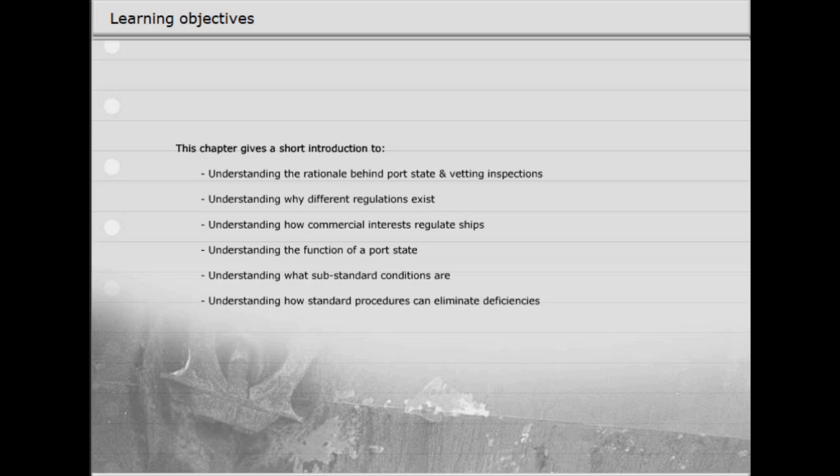The US Coast Guard exercises port state control in US waters. It ensures compliance with the pollution prevention and safety regulations.

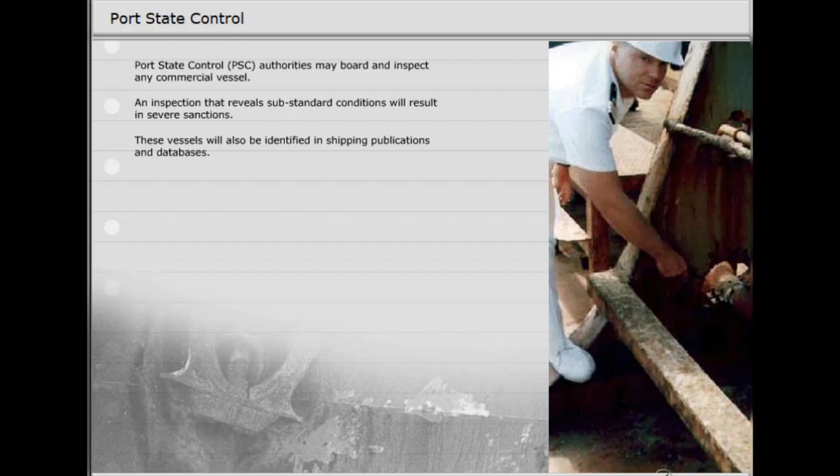The Oil Companies International Marine Forum is a voluntary association of oil companies. It maintains the Ship Inspection Report Programme. This is a large database of up-to-date inspection results about tankers.

The Chemical Distribution Institute provides a control scheme for chemical carriers and terminals. It also trains inspectors from senior chemical carrier officers. The database is available to all participating companies, ship owners and terminal operators.

The adoption of standard procedures is mandated under the International Maritime Organization's International Safety Management Code. It requires most ship operators to have a certified safety management system in place. Click on the illustrations to read about them.

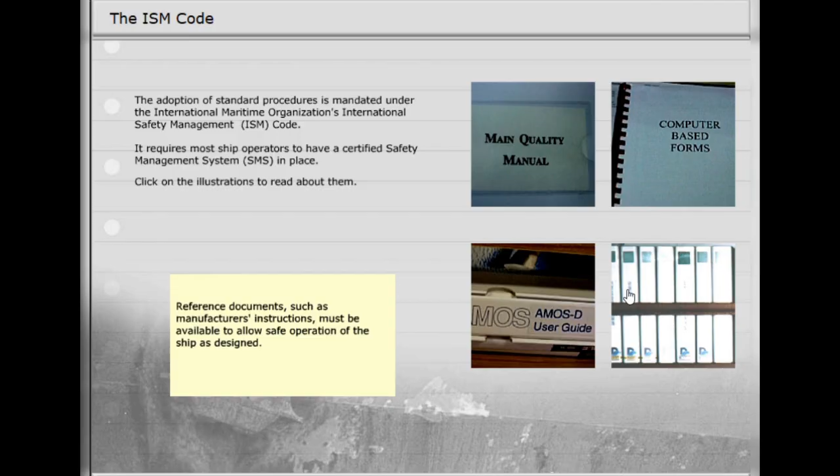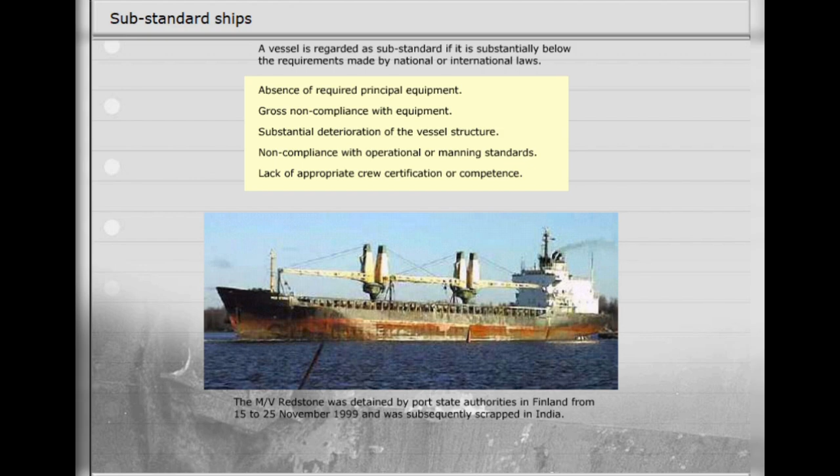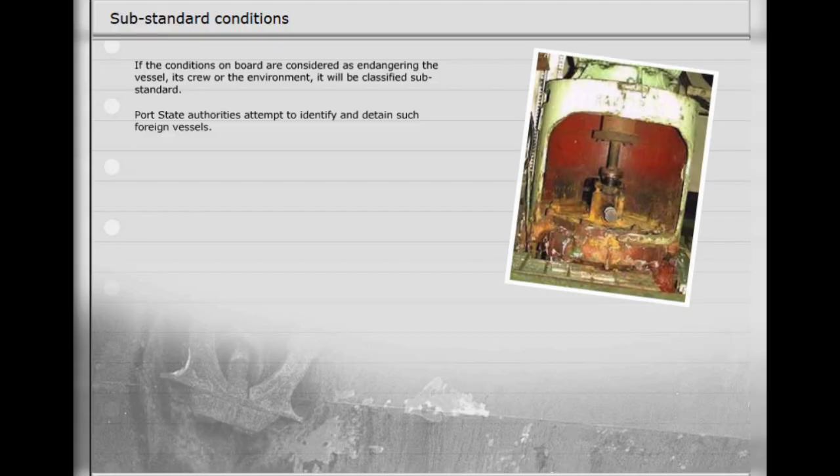A vessel is regarded as substandard if it is substantially below the requirements made by national or international laws. If the conditions on board are considered as endangering the vessel, its crew or the environment, it will be classified substandard. Port state authorities attempt to identify and detain such foreign vessels.

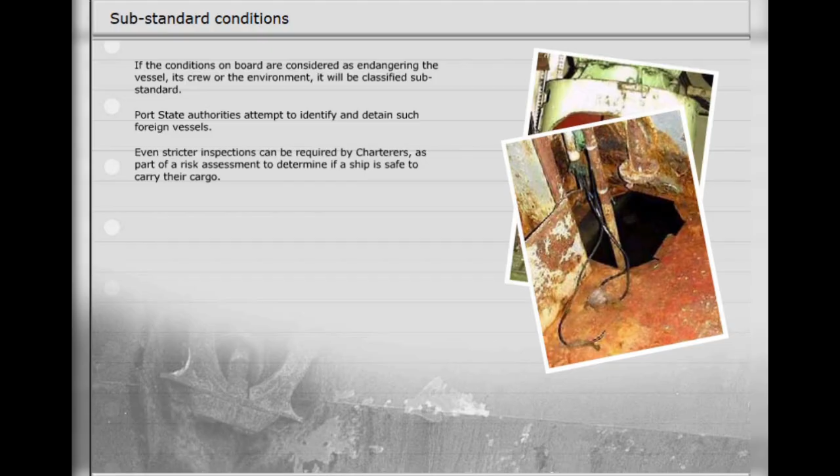Even stricter inspections can be required by charterers as part of a risk assessment to determine if a ship is safe to carry their cargo. Tankers are faced with the most stringent requirements from the oil and chemical companies which use them.

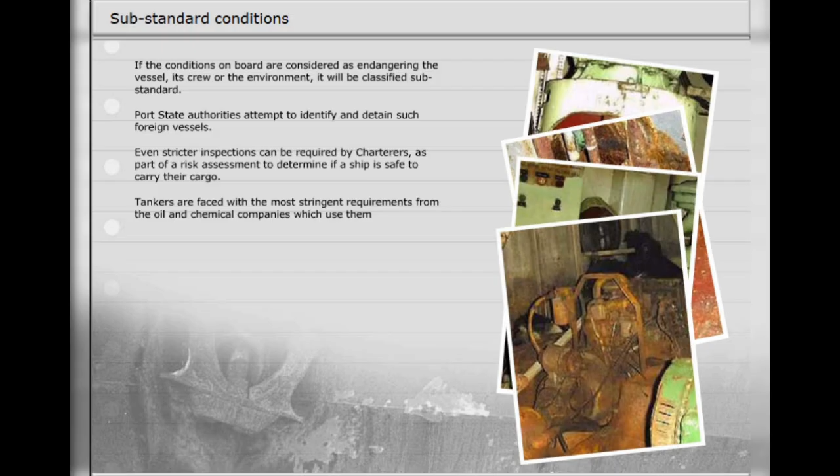Several publications serve as references and guidelines that can prevent port state sanctions. Click on the icons to read a list of some of them.

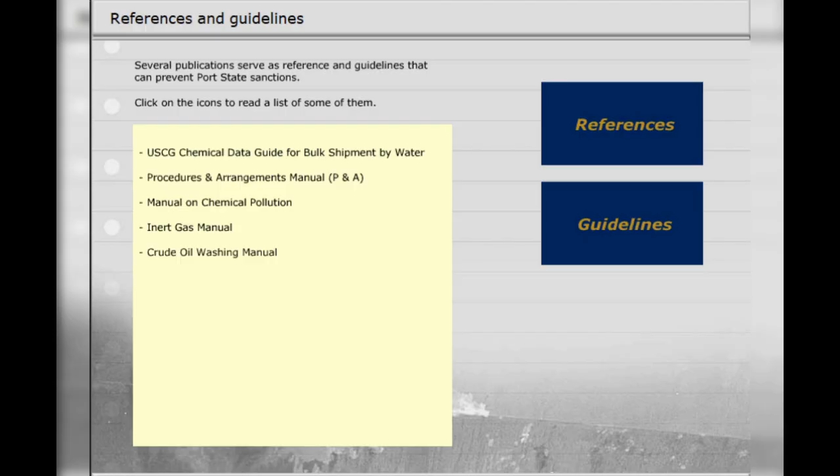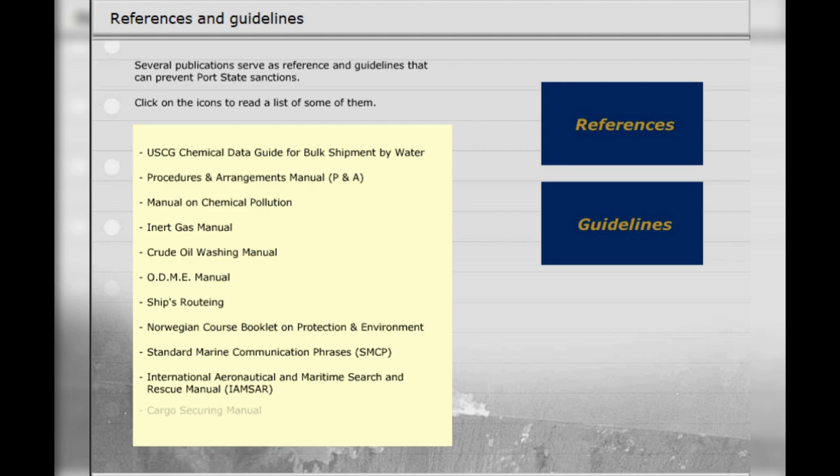If the officers and crew comply with the company's standard operating procedures, deficiencies will, for the most part, be eliminated. Creating and working within a properly developed safety management system should be the primary focus of the operator and the man on board.

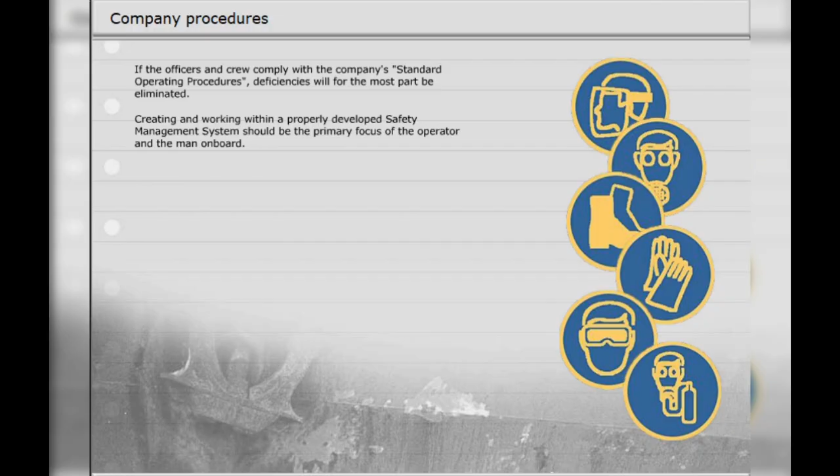An inspection cross-reference is very helpful to the men on board during an inspection. It allows reference to company procedures in the SMS manuals, where vetting or port state requirements are met. It should be used during the inspection and at the closing meeting with the inspector. Inspection findings and ship's comments should be reported to management at the earliest opportunity.

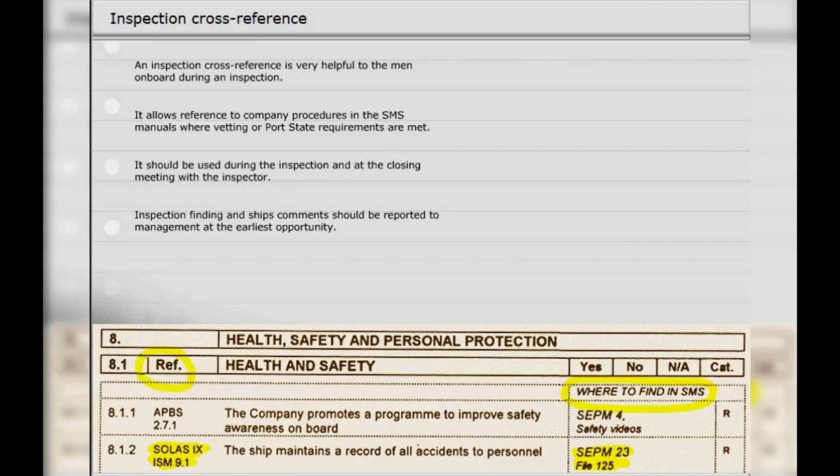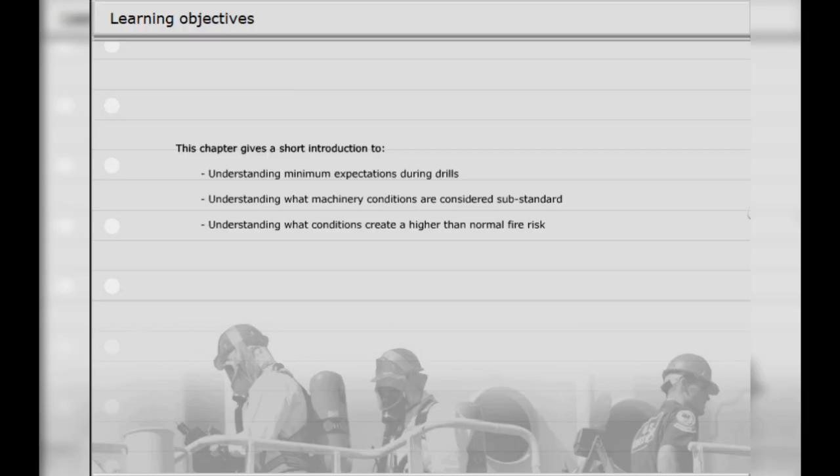To, understanding minimum expectations during drills. Understanding what machinery conditions are considered substandard. Understanding what conditions create a higher than normal fire risk. Understanding how inspectors determine crew awareness of instructions and procedures.

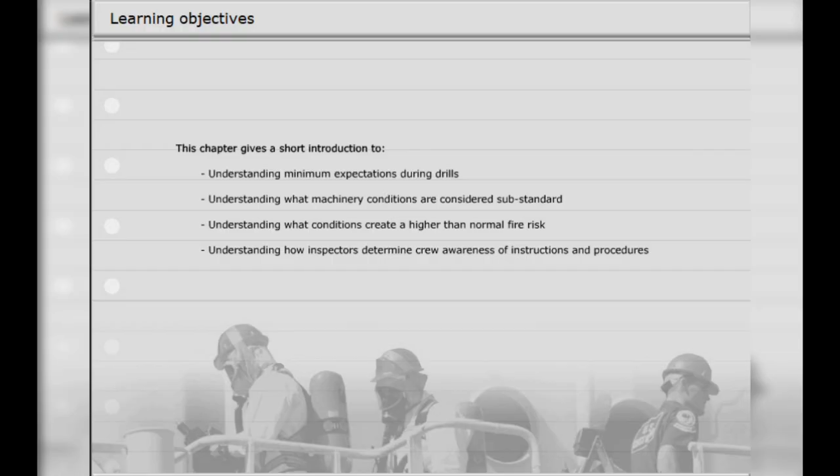During inspection, both equipment and crew competence are tested. Inspectors will focus on emergency drills. Failure to perform basic fire and lifeboat drills will certainly result in detention. Since the master is normally on the bridge, the chief officer must demonstrate that he has command and control of the emergency team.

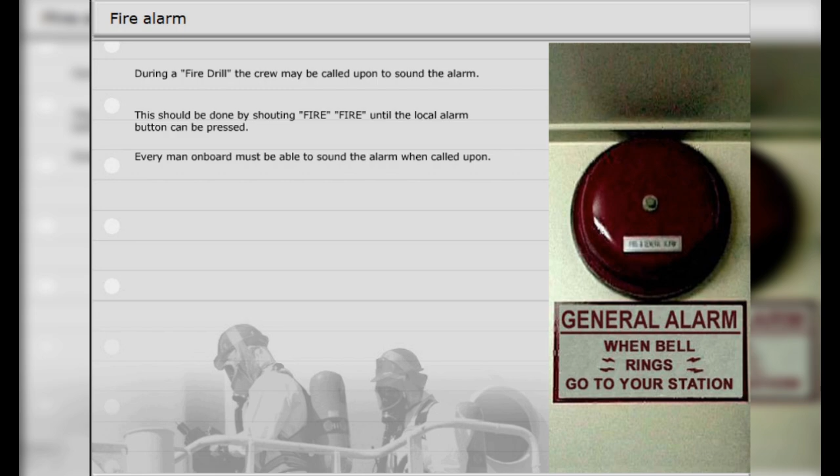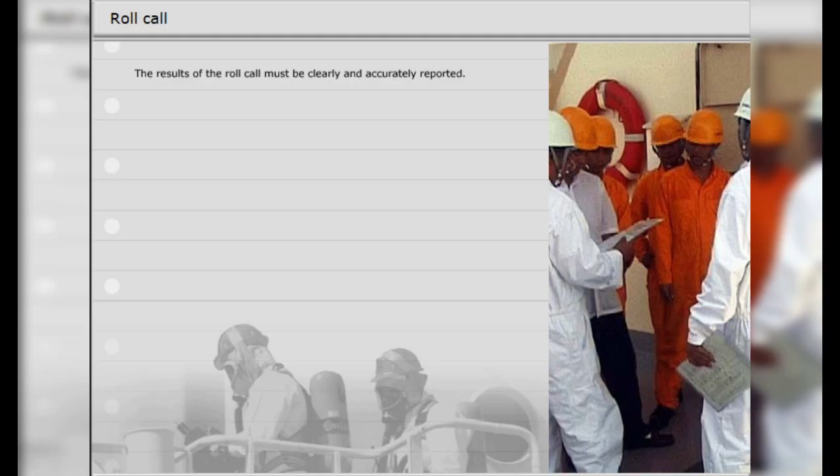The results of the roll call must be clearly and accurately reported. The master must be advised that the emergency teams are suited up and ready. The individual charged with investigating the fire must clearly report its location, classification, and boundaries.

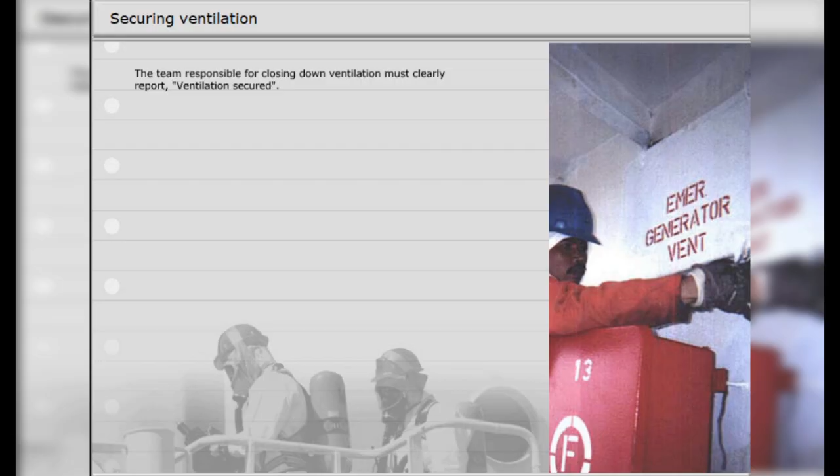The team responsible for closing down ventilation must clearly report ventilation secured. The technical team must report that the fire pump is online and electrical power is secure. Only then, and with the master's direction, should the emergency team commence fighting the simulated fire.

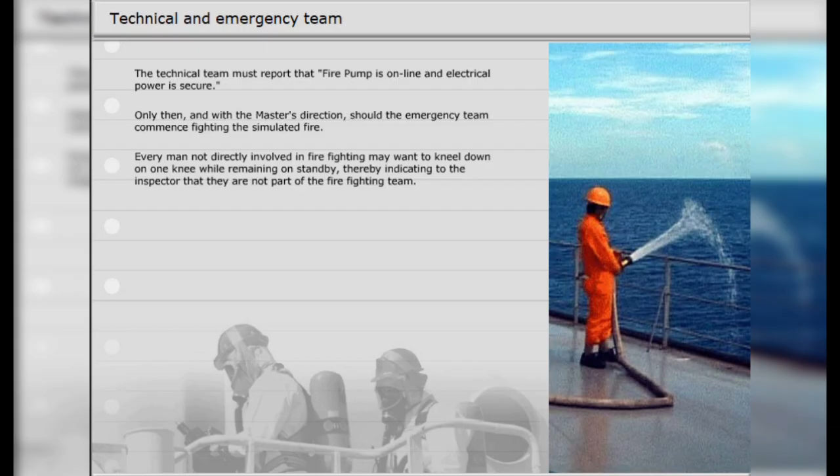Every man not directly involved in firefighting may want to kneel down on one knee while remaining on standby, thereby indicating to the inspector that they are not part of the firefighting team. The fire team should not begin breathing bottled air until the order is given. Otherwise, bottles will be empty too soon.

If lifelines are to be used, the signals between tender and smoke diver must be clearly understood. When possible, the fire party should be split into two groups, an attack squad and a cooling or backup squad.

During a boat drill, the results of the roll call must be clearly and accurately reported. Every man must report to muster with his assigned equipment and a life jacket on. The boat crew must commence lowering the boat on the chief officer's command. Additional equipment, such as radio and extra blankets, must be brought to the boat.

The lifeboat engine should be warmed up in advance of an inspection to ensure smooth starting. For safety reasons, the boat should be first lowered to the water without anyone inside. Crew can either embark using the ladder or the boat can be returned to the embarkation deck for boarding. Manning requirements and launching techniques may vary with lifeboat design, particularly modern free-fall types.

There should be lifeboat instructions in the ship's SOLAS training manual and in the vicinity of the lifeboat. All crew members must know what boat and duties they are assigned to. Don't forget details such as removing the gripes, securing the painter, etc.

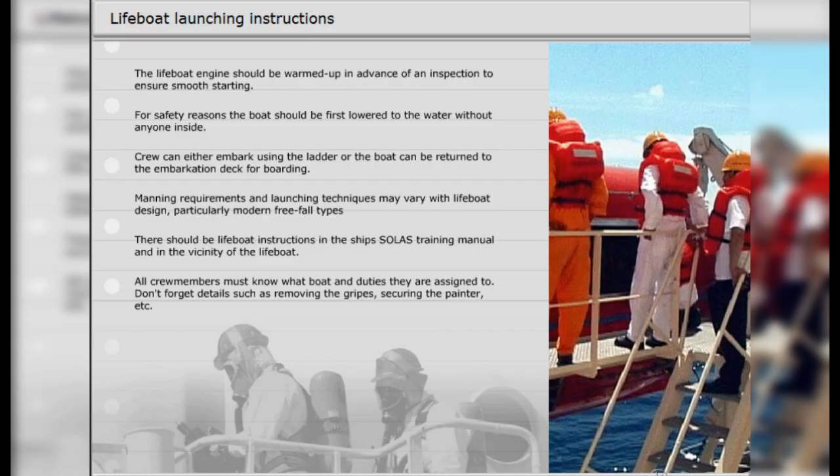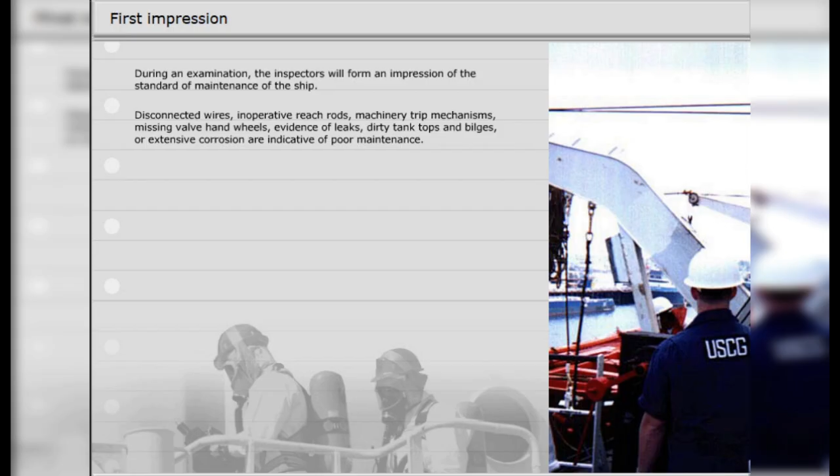During an examination, the inspectors will form an impression of the standard of maintenance of the ship. Disconnected wires, inoperative reach rods, machinery trip mechanisms, missing valve handwheels, evidence of leaks, dirty tank tops and bilges, or extensive corrosion are indicative of poor maintenance. A large number of temporary repairs indicate a reluctance to make them permanent. Such deficiencies can result in a port state detention.

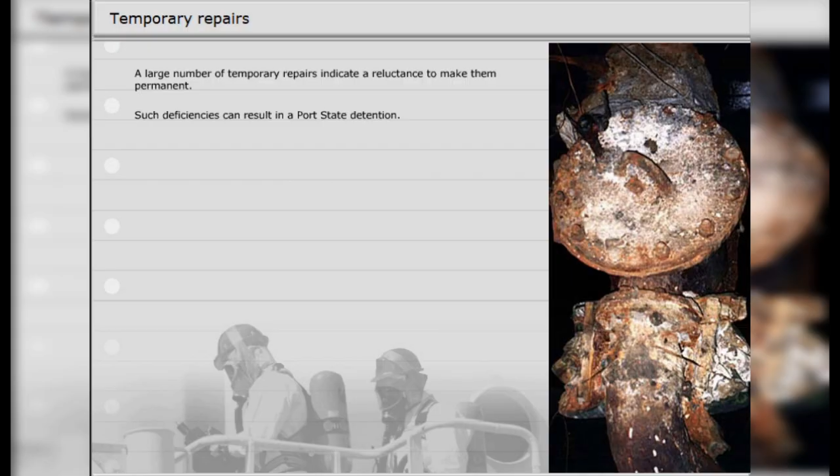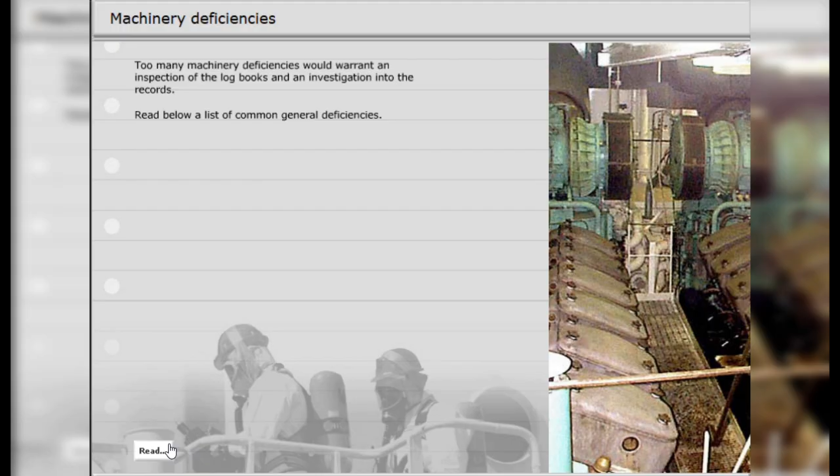Too many machinery deficiencies would warrant an inspection of the logbooks and an investigation into the records. Read below a list of common general deficiencies. Poor condition of fire hydrants or absence of fire hoses and extinguishers points to a need for a close inspection of fire safety equipment. The crew should check the valves at every drill. Frozen or rusted equipment indicates a lack of maintenance.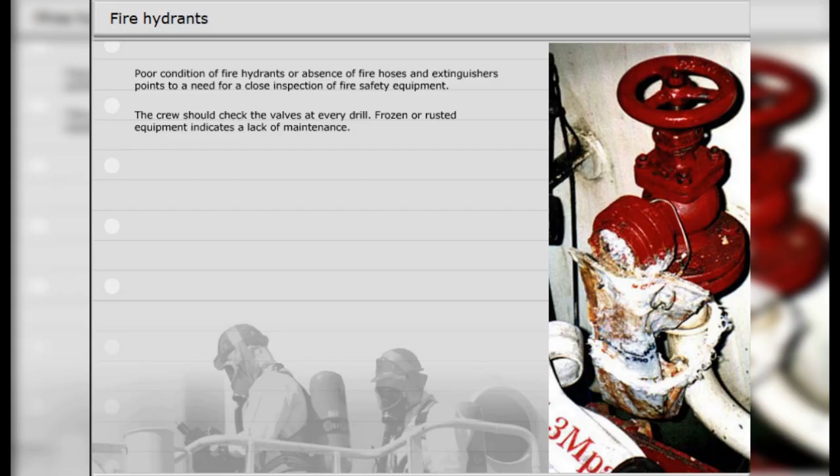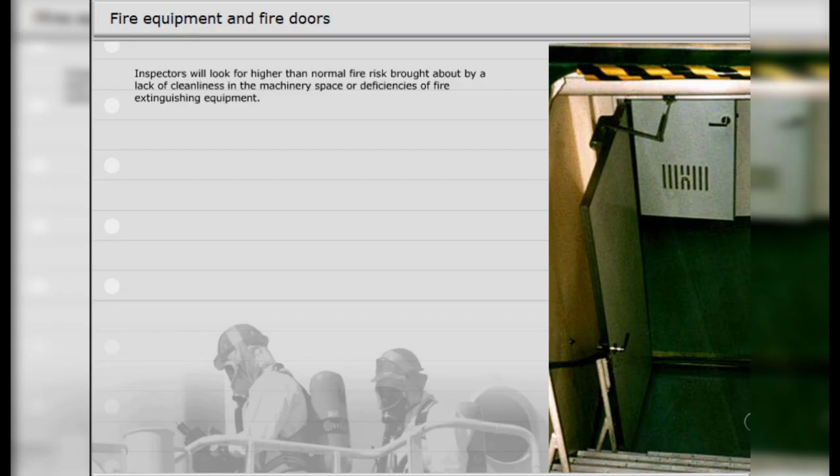Inspectors will look for higher than normal fire risk brought about by a lack of cleanliness in the machinery space or deficiencies of fire extinguishing equipment. They will also inspect doors in all boundaries of high fire risk spaces, such as the main machinery rooms and galleys. Particular attention is paid to doors retained in the open position. The use of holdback hooks should be discouraged.

An additional hazard in the event of fire is the spread of smoke through ventilation systems. Spot checks may be made on dampers and smoke flaps to ascertain the standard of operability. The inspectors may also request a demonstration of the emergency ventilation shutdown system. All officers must know how to stop ventilation systems.

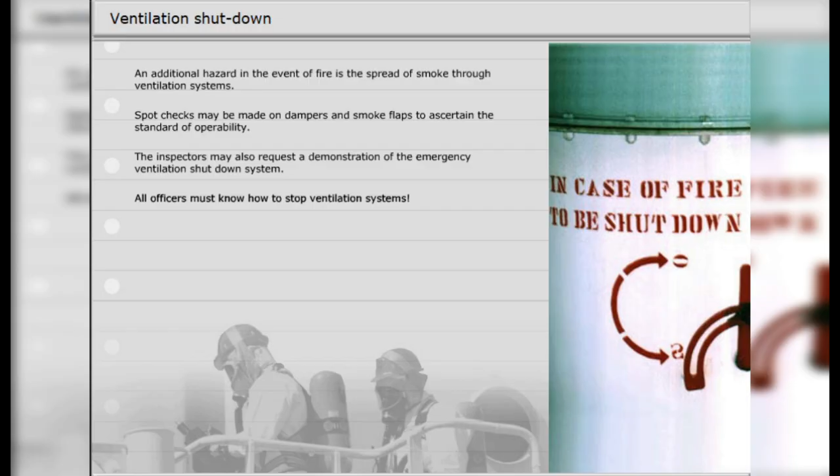Attention should be given to escape routes by ensuring that vital doors are not locked and that alleyways and stairways are not obstructed. Regulatory and customer inspections should ensure that a continuing focus on equipment condition is maintained on board.

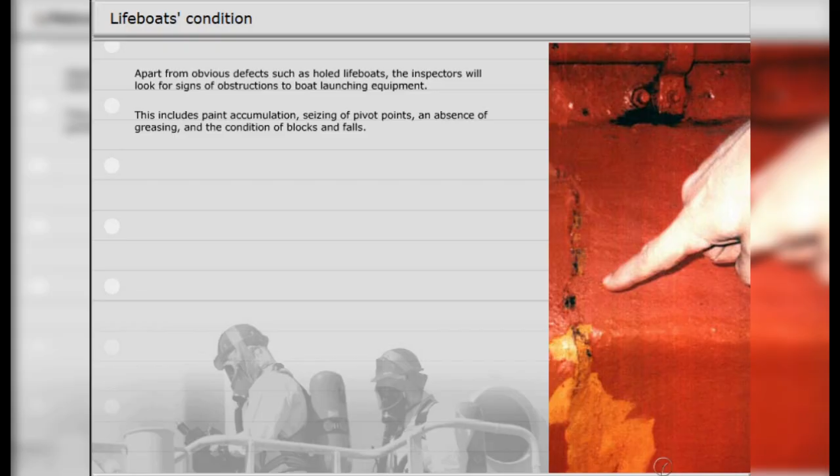Apart from obvious defects, such as holed lifeboats, the inspectors will look for signs of obstructions to boat launching equipment. This includes paint accumulation, seizing of pivot points, an absence of greasing, and the condition of blocks and falls. The inspectors should ensure that their action has no interference with the safe operation of the vessel, like cargo handling. They should not impose physical demands that, in the judgment of the master, could jeopardize the safety of the vessel, crew, passengers, or cargo. Remember that, even though inspectors are on board, it is the master who always has overriding authority.

The stationing of pollution response equipment on deck is applicable to both cargo and bunker operations. Portable pumps should be rigged and ready for use at the aft end of the cargo deck on port and starboard sides. Non-sparking shovels, squeegees and sorbents should be likewise pre-positioned and clearly marked. The inspectors will also check to see that all fixed containments are clean and empty prior to any transfer operation.

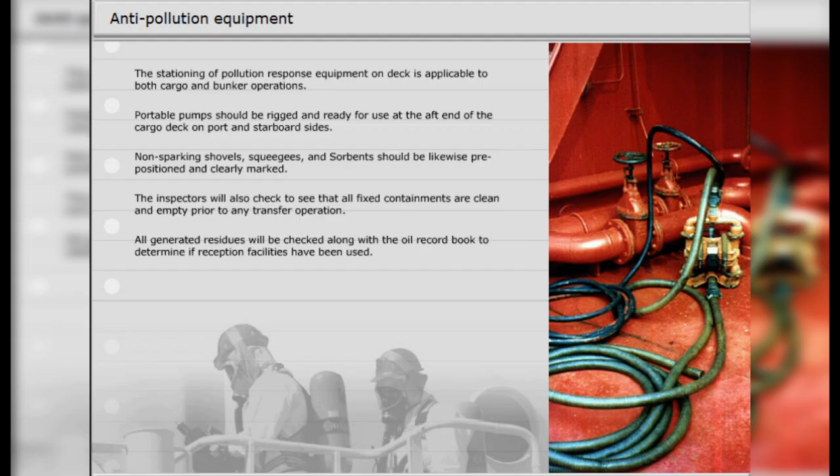All generated residues will be checked along with the oil record book to determine if reception facilities have been used, and to determine if all garbage requirements of Annex 5 of MARPOL 73/78 have been met. Furthermore, they may determine if reception facilities have been used and note any possible inadequacy.

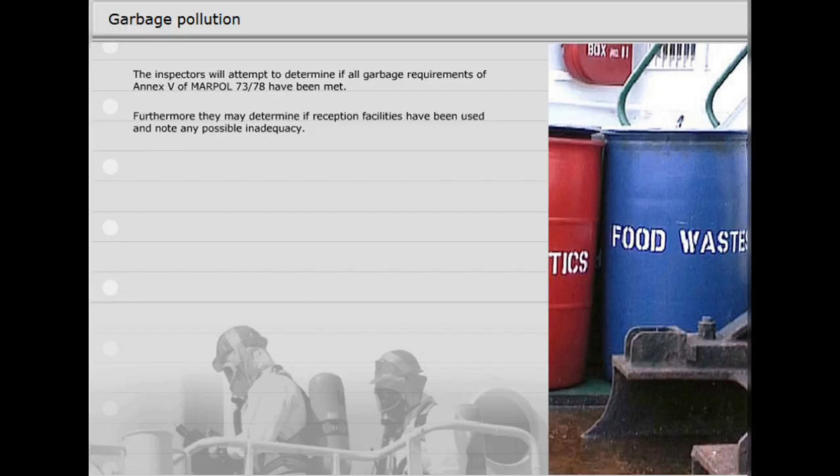The inspectors will attempt to find if the key crew members are able to communicate with each other. They will also find if crew members understand the information given in manuals and instructions relevant to safety. Then they will ensure that they are aware of requirements for maintenance, testing, training drills, and required logbook entries. In particular, they may look to determine if the crew members are aware of their duties, as indicated in the muster list.

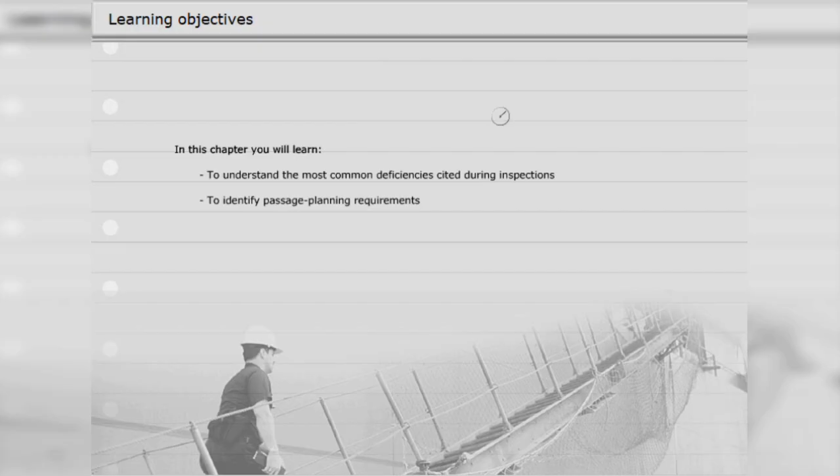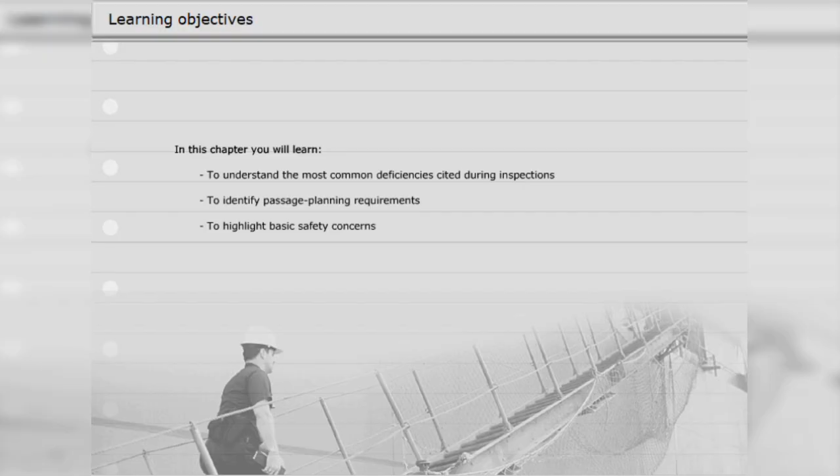Learn to understand the most common deficiencies cited during inspections, to identify passage planning requirements, to highlight basic safety concerns. The inspectors will examine the ship's logs and certificates. Vetting inspectors will require a completed Vessel Particulars questionnaire. The inspectors will also check drug and alcohol policy implementation.

Records of the crew's working hours should be made available in compliance with the STCW 95 recommendations for preventing fatigue. Watch schedules detailing the working hours of all watch-keeping personnel should be posted. The certificates of the master and officers will be inspected to confirm validity for the ship and for the Flag Administration. Licenses must be issued or endorsed by the Flag Administration and contain proper dangerous cargo endorsements when needed.

Certificates for deck officers must be valid for the size of ship and trading location. Certificates for engineering officers must be valid for the type and power of the ship. Inadequate passage planning is the most common deficiency cited in vetting inspections. Read here a few points that require attention.

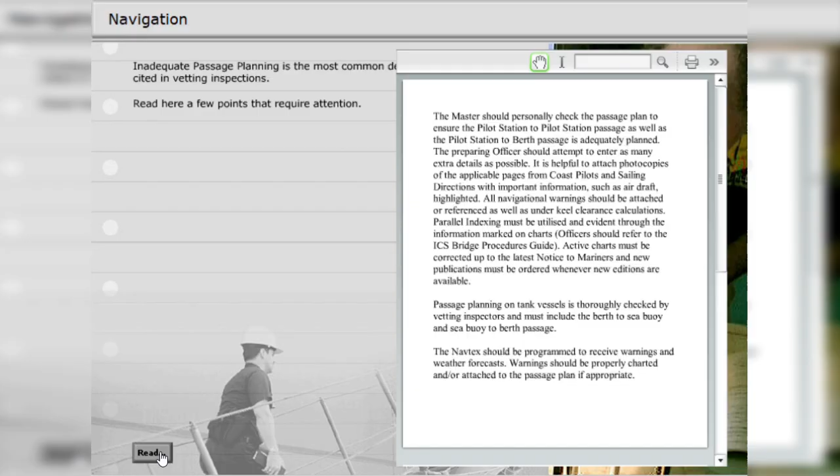Waste bins should be constructed of metal, and public areas should have separate bins for plastic and ocean disposable materials. The galley waste bins should be checked to ensure that plastic material has not been accidentally mixed with food waste.

Paints and solvents must never be stored in non-authorized areas. Cans of thinner and open paint must be removed from those areas where paintwork was recently completed. The door to the paint locker and sample locker should be closed, with no smoking signs posted adjacent.

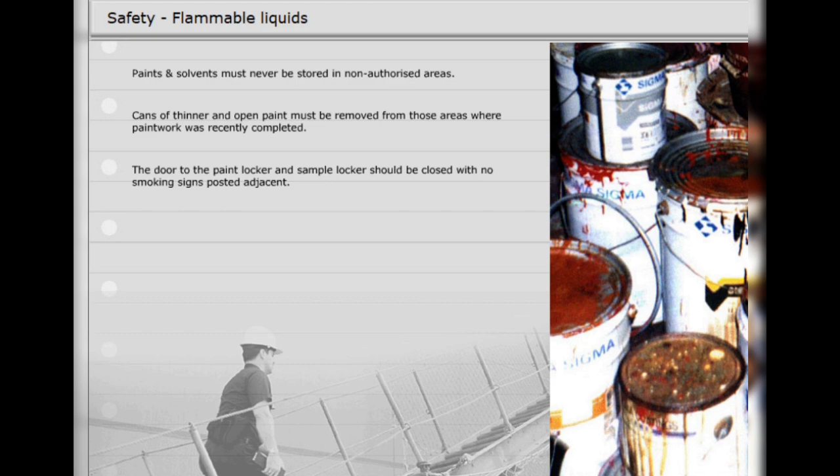Handheld walkie-talkies and torchlights should be examined to confirm their acceptance for use in hazardous atmospheres. Only approved equipment should be used on tankers, even in the engine room. No mobile phones are allowed on deck.

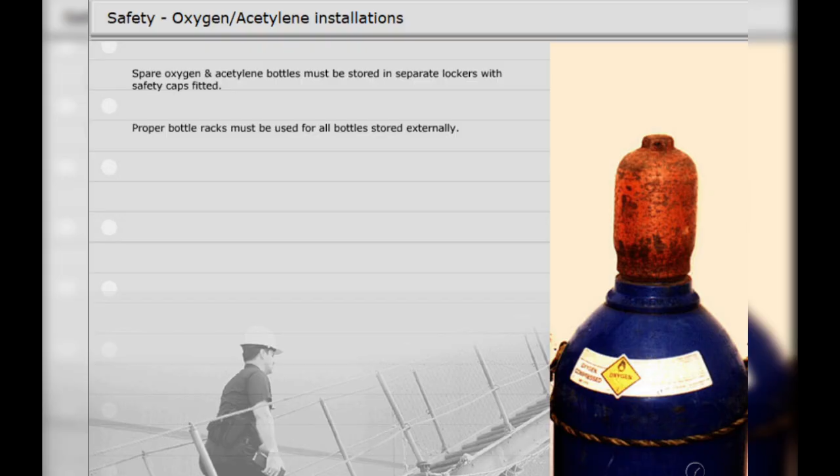Spare oxygen and acetylene bottles must be stored in separate lockers with safety caps fitted. Proper bottle racks must be used for all bottles stored externally. The cutting torch must be fitted with flashback suppressors, and the pressure gauges should indicate no pressure on the torch. No smoking signs should be posted adjacent to each storage area.

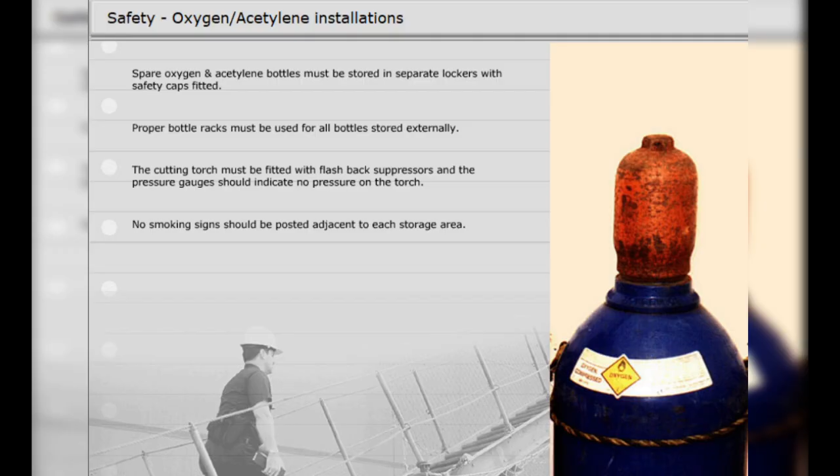The SOLAS required Safety Equipment Training Manual will be examined to ensure that its content is specific to the ship. The manufacturer's instructions should be included wherever possible.

The self-contained breathing apparatus, SCBA, is one of the most important pieces of emergency equipment on board. The inspector will therefore want to confirm that all sets are maintained properly and ready for use in an emergency. Read more about their requirements.

Safety equipment lockers must be properly equipped, located, and readily identifiable. Different types of vessels are subject to different rules regarding the inventory, type, and quantity of equipment that must be carried. Fire and safety plans must identify the quantity and location of all firefighting and life-saving equipment on board. IMO's pictograms that correspond with the fire plan allow ready identification in an emergency.